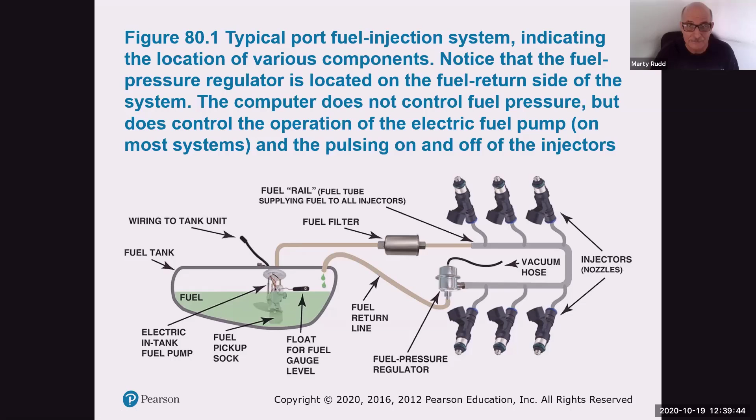And here's one of the early systems.

Like I said before, we had carburetors, and the carburetors were mechanically driven. Well, I consider this system an electronic carburetor, because it did pretty much the same thing that the carburetor did, but it did it as an electronic version of it.

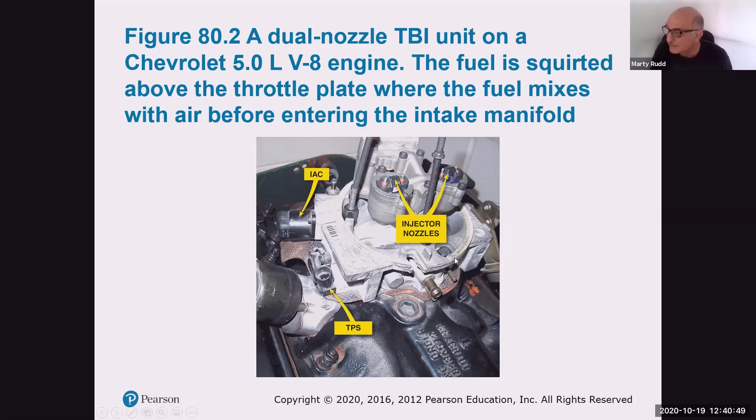With this, fuel was delivered kind of similar to what a carburetor would do, but it would be forced down inside, having to populate through the whole intake system, and then it would bring it down behind the intake valves, and then into the cylinders. It wasn't very efficient. It was better than a carburetor, but not as efficient as what they call a port injection system, which we'll be talking about soon.

So this is one way they did it on early models, and now pretty much all your vehicles are either port injected or, more commonly nowadays, gasoline direct injection, which we'll talk about in the next slide show presentation. So instead of having to populate the whole intake system before it finally gets down into the valve...

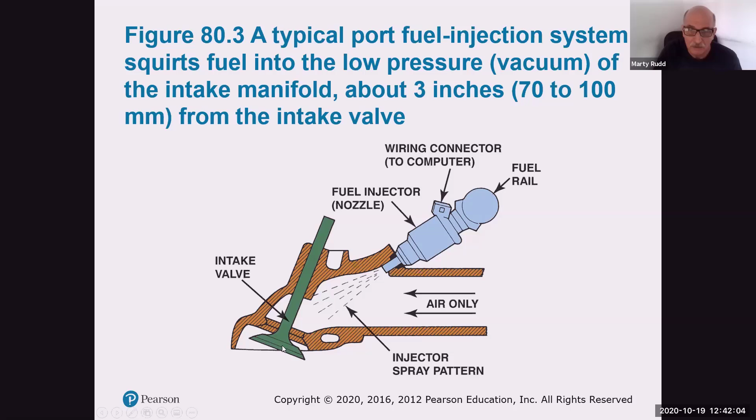Now all we need to do is have air coming through the top, and then we put the right amount of fuel right to the backside of the valve. This helped quite a bit, and we could get the fuel where we needed it and manipulate it more directly if we needed more fuel. Whereas with the throttle body type systems I showed before, it had to populate all that to get into there, and it wasn't as quick a response. It wasn't a huge difference, but it was a bit of a difference. So if you wanted something for performance, throttle bodies really didn't do it as well as port injection systems did.

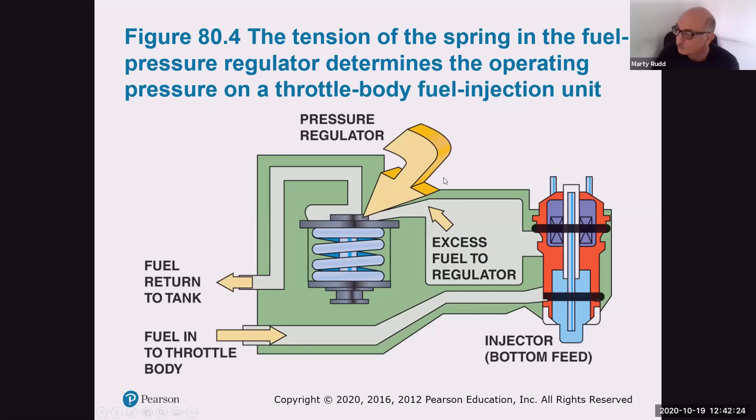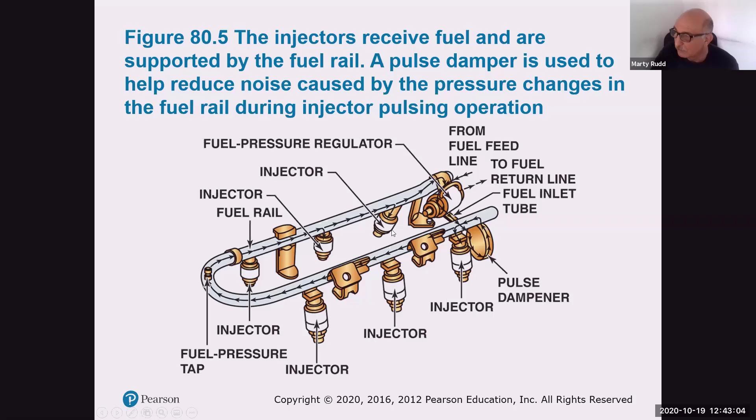We did have pulse dampeners. These pulse dampeners were good for keeping noise reduction down like that too. And here we actually have the fuel regulator on this particular model.

Now that was a misting type. It was not just a squirt, there's misting going on. So I want to make sure you're clear on that too.

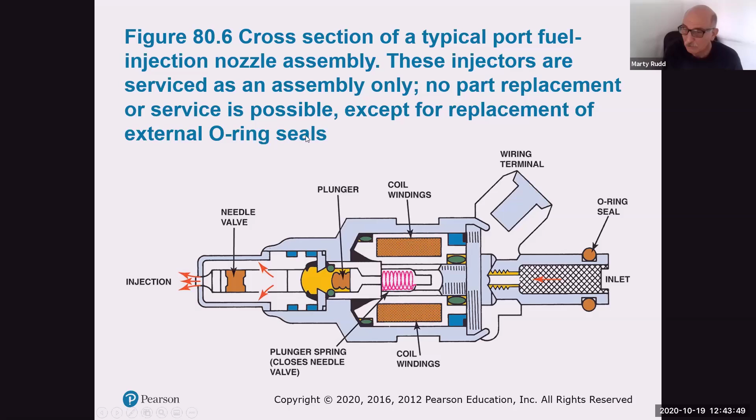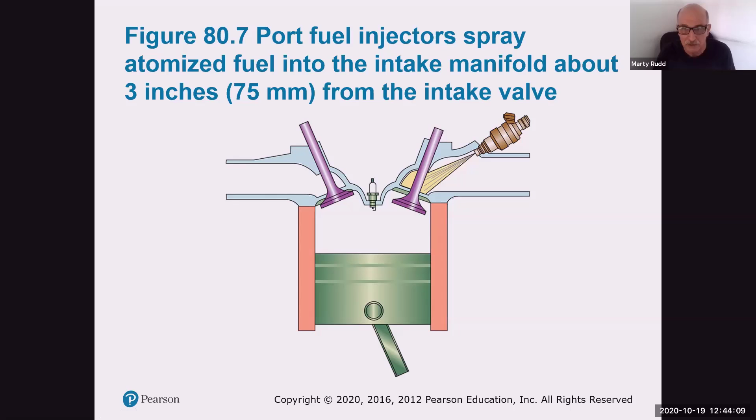And here is a good picture showing the port injection system, how it's actually spraying that atomized spray right behind the intake manifold valve, waiting for it to come. Now different types of systems would do it a little differently, but this is showing you a sequential type right now, meaning it sprays when it needs it.

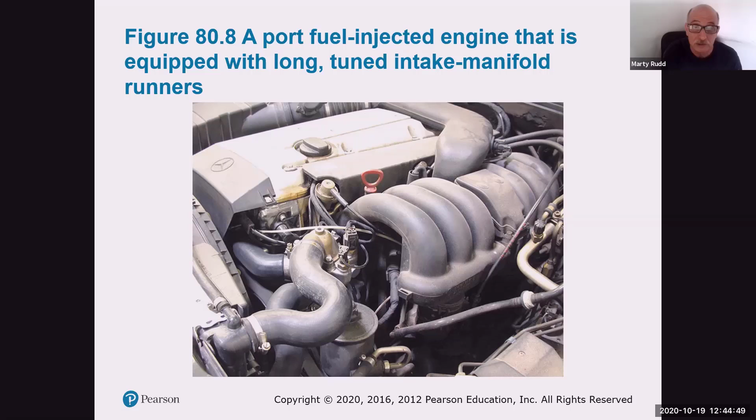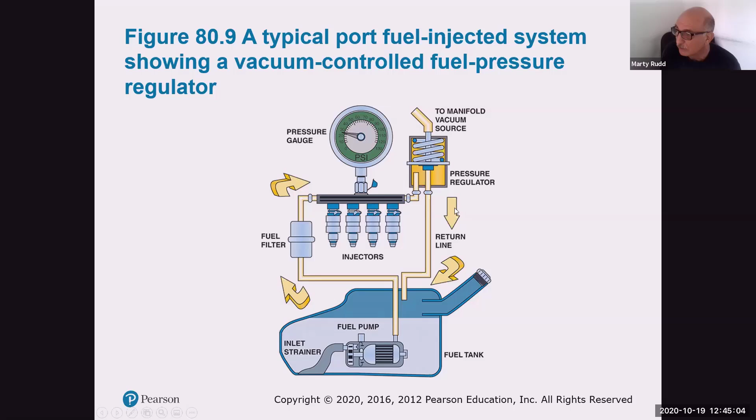Here's a diagram of how it's controlled through a vacuum diaphragm type regulator. The fuel comes in, and when pressure comes up, it actually returns the fuel back.

Here's a cutaway showing that again. If it's blocked off, it's not going to return anything, so we have a big load value in the engine, and vacuum actually drops. Whereas with more applied vacuum right now, it allows it to return some of the fuel back to the fuel tank.

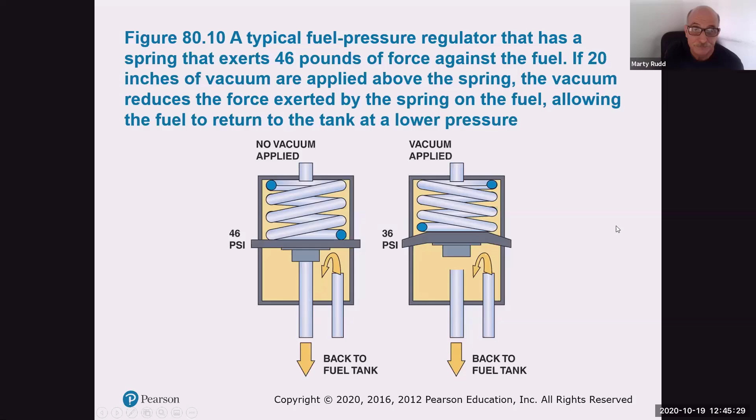Here's a cutaway of it and how it looks. It's filtered, of course, and that spring is allowing it to open and close.

This is more of an electronic version of it, and it actually has a pressure sensor too, so it can tell the computer whether it needs more voltage or less voltage - I should say more fuel or less fuel. It can cause the pump to spin faster or slower just by running through this sensor itself.

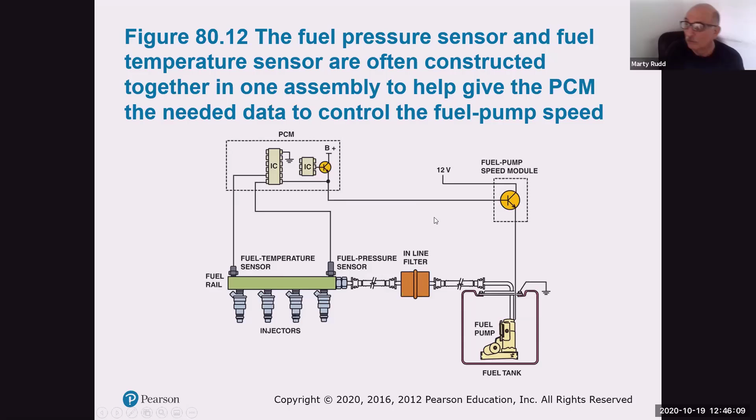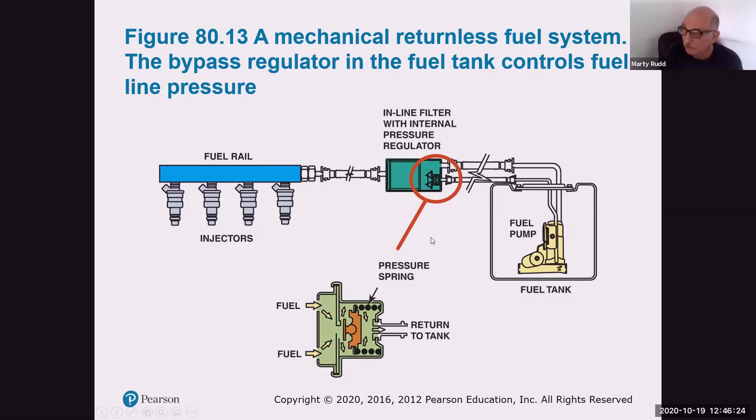You'll notice something different here - where's the return? It doesn't have any return on it. And here's another one with the actual return. It's kind of similar to the vacuum one we had before, but this one is actually inside the tank also.

Here we have a rectangular shaped rail instead of the round type. You'll notice here's the service ports - we can actually check for pressure. And here's the injector down inside with the connectors for it.

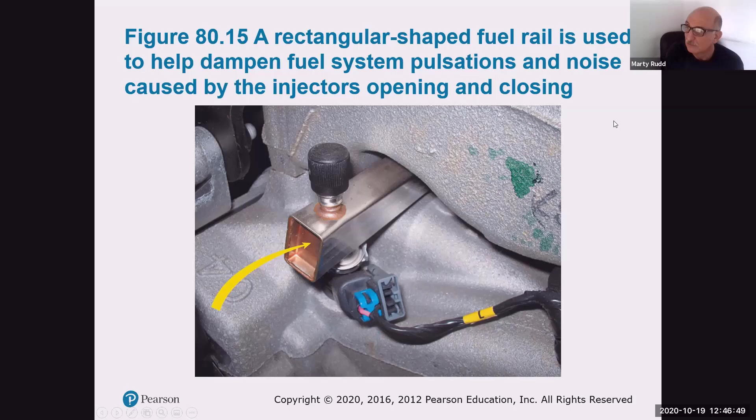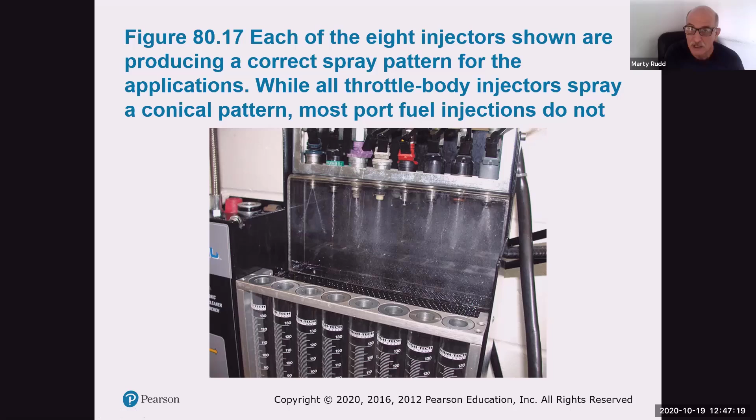Some of these injectors are just bad. Sometimes you can clean them up, and sometimes you just can't. This is one of the things I wanted to show you.

This was a system General Motors put out, and I called it Spider - a central port fuel injection system. It had one injector inside, and it had a set of tubing that went down to each one of the different cylinders.

Right behind the intake valve, they would mist it all, pretty much off of a poppet valve, causing it to mist inside. Then when the intake valve opened up, it would allow that charge to go inside.

I got very good at replacing these things - minivans used them quite a bit in the 90s. They would give you 4 hours to change one out because you had to take the upper half of the intake manifold off, but I could do it in an hour and a half because I got pretty quick at it.

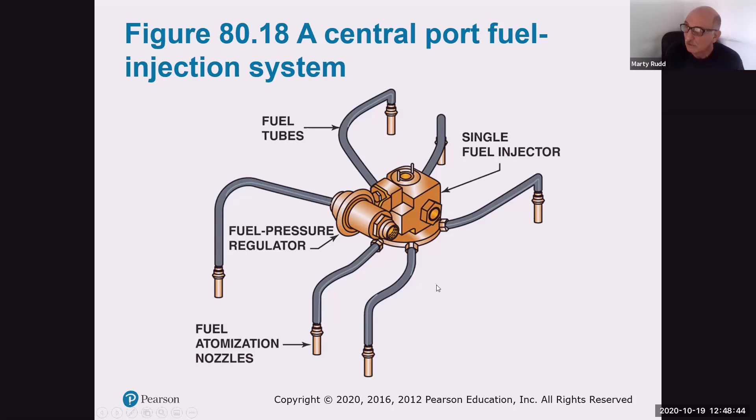General Motors never really fessed up until later that there was a problem with a vendor. They did start, if you had under 100,000 miles on the vehicle and had receipts, reimbursing you the money like that.

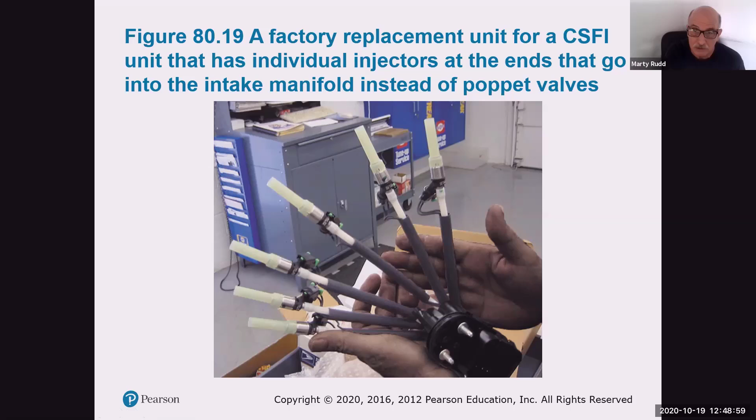This is what the updated version was. It actually had a single injector for each one, which was really, really a much better setup - similar to the old one, but it made for a much better, cleaner setup.

All right, so we will pass on this stuff because it's more of an advanced talk about air control, but we'll get a little bit into that as we go along.